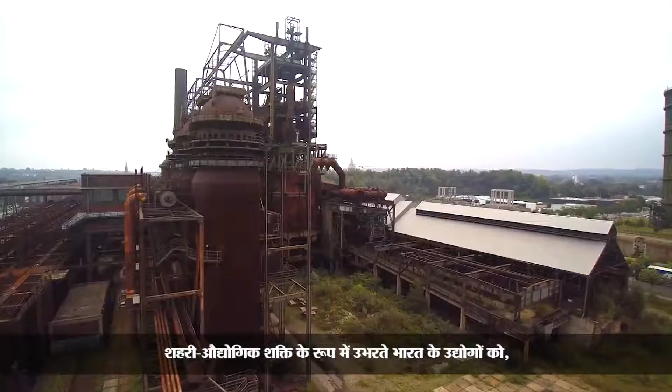As India seeks to propel itself into an urban industrial powerhouse, its industries will need more and more water. This is going to put further immense pressure on the already strained water supply systems of urban areas. 80% of all water that is painstakingly supplied to households leaves as waste. So, do cities require more water, or can they learn to manage their water better?

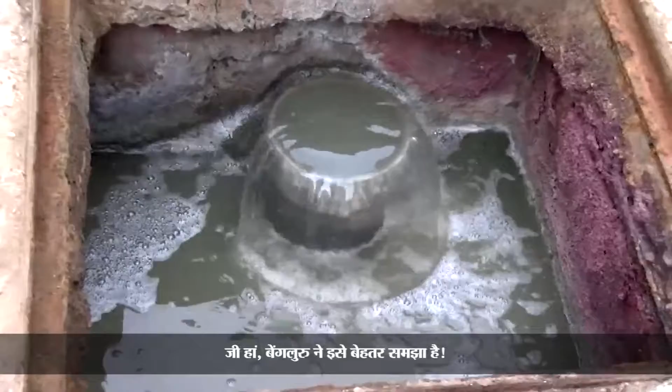Yes, Bengaluru gets it right. It is recycling its wastewater and reusing it for meeting non-potable requirements of the city. Let's see how.

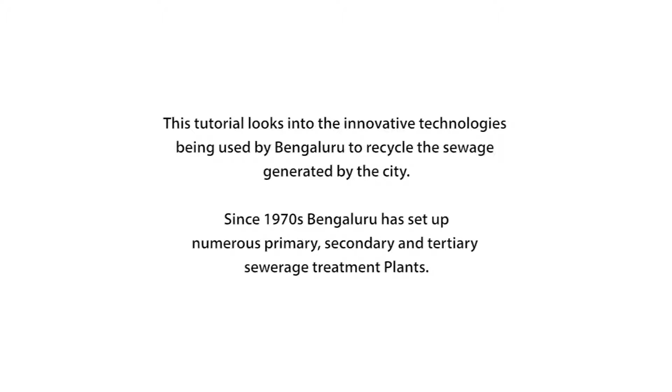स्वच्छ भारत का इरादा इरादा कर लिया हमने देश से अपने ये वादा कर लिया हमने स्वच्छ भारत का इरादा कर लिया हमने देश से अपने ये वादा

Home to 8.5 million people, Bengaluru is one of the fastest growing cities in India. A city of lakes and a city of aspirations, this picture of a beautiful life cracks the moment you inquire about the water supply in an area from those already living there.

Bengaluru, like most cities, was headed towards a severe water crisis. Its location in a semi-arid region makes it naturally water scarce. The Bengaluru Water Supply and Sewerage Board is the statutory organization in charge of supplying water and sewerage services to the city. The city draws 1,350 MLD of water from the river Kaveri, from a distance of almost 100 kilometers.

The board spends 60% of its entire annual budget towards just bringing the water to the city's periphery. Almost 1,000 MLD of wastewater leaves the city as sewage.

Bangalore's demand was never satisfied. The current demand is about 1,600 MLD, and we are supplying about 1,400 MLD of water. There is a gap of about 150-200 MLD. Most of this gap is met out of the groundwater within the city, as well as the wastewater.

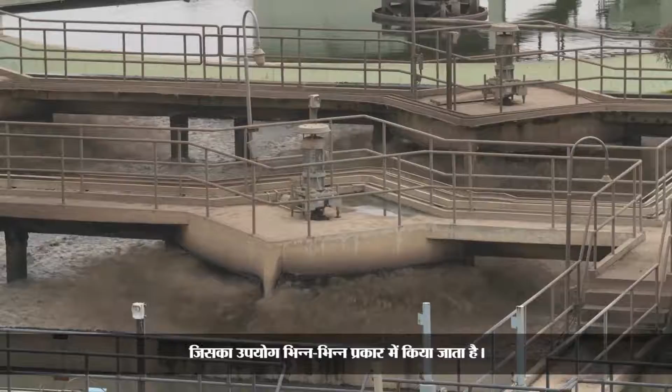Bengaluru has established 4 tertiary treatment plants that produce 73 million liters per day of close to drinkable water. These treatment plants use different technologies and provide water that is then put to different uses. One of them is the biggest tertiary treatment plant in India, set up in Vishwavati Valley, or V Valley.

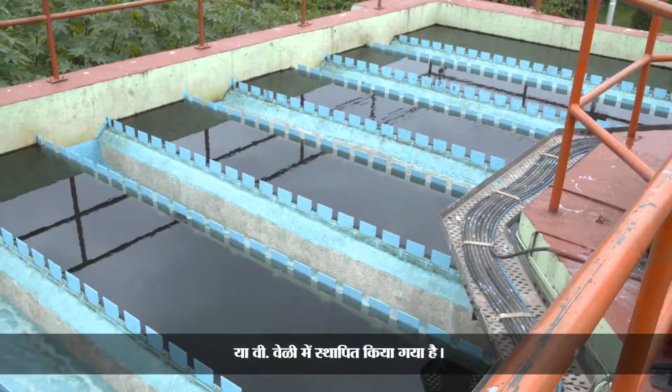The Vishwavati Valley, or V Valley, tertiary treatment plant has a total capacity of 60 MLD and treats 10 MLD of water per day. The V Valley treatment plant was funded by the Housing and Urban Development Corporation of India under the Mega City Scheme and by the Indo-French Protocol. Operation and maintenance of the plant is managed by the French firm Degremont Suez.

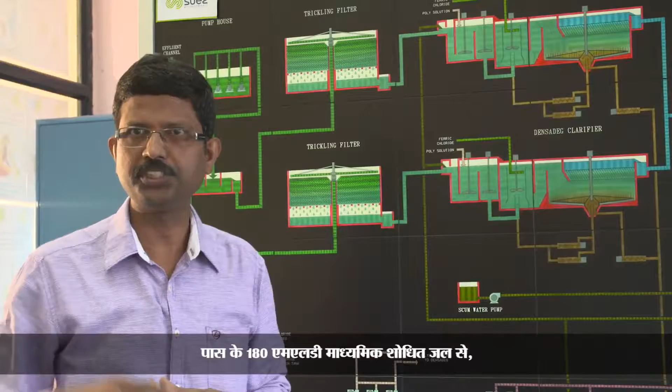One of the biggest recycling plants in India, the capacity of the plant is 60 million liters a day. Essentially what we do here is tertiary treatment of the secondary treated sewage which is generated in the 180 MLD STP, located adjacent to this plant.

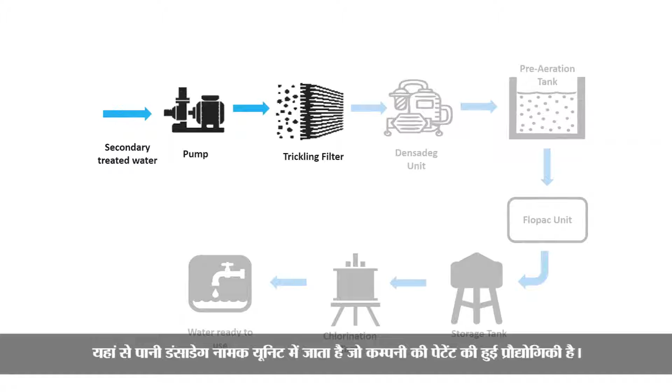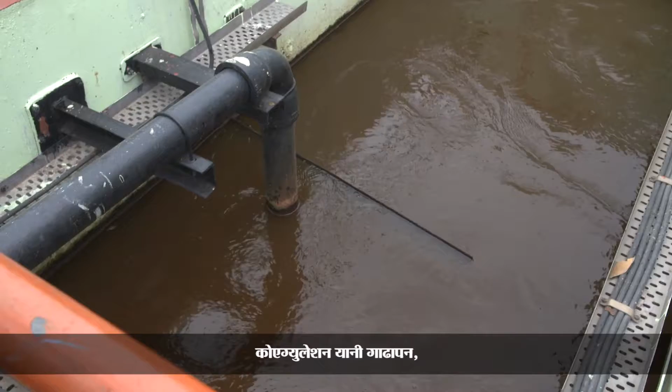The secondary treated water is pumped to the trickling filters. From here, the water then flows into a unit called the Densadeg unit, which is a patented technology of the firm. This unit treats the water through three processes: coagulation, flocculation, and clarification. The water then goes to the pre-aeration tank to raise the dissolved oxygen level in the water.

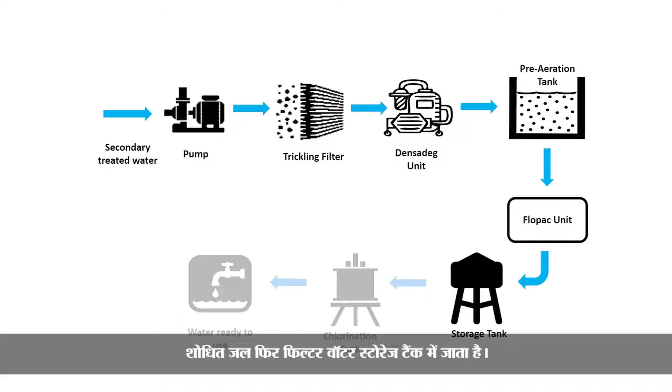The water then reaches the Flopac unit. Here the bacteria in the sand medium eat up the organic matter, and the finer particles settle in the sand. The treated water then goes to the filter water storage tank. The water is then disinfected with chlorine and is now ready to be sold to industries.

The capital cost for the 60 MLD treatment plant at V Valley was Rs 12 crores. The plant is able to cover the O&M costs of the plant of Rs 4.7 lakhs per month through sale of treated water to the industries.

Another major requirement for water in Bengaluru is for irrigating its gardens. The tertiary treatment plant at Cubbon Park provides water for maintaining the park. Their borewells were dry. Then they approached the BWSSB to ask whether it could provide very good quality treated wastewater for their horticulture purpose.

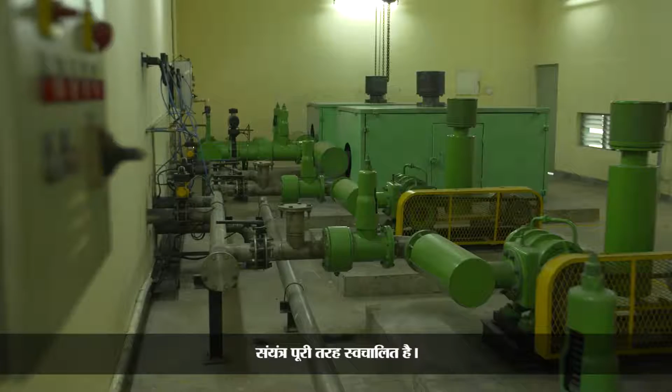Then BWSSB, with funding from the Bangalore Development Authority, came up with a 1.5 MLD state-of-the-art treatment plant. The tertiary treatment plant in Cubbon Park uses membrane bioreactor technology for treating wastewater. The plant is fully automated, and the operation, monitoring and controlling is carried out by a SCADA system.

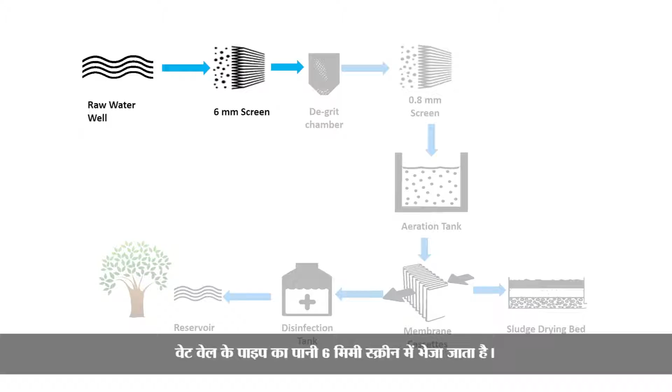The water comes into the plant from nearby areas like Vidhana Soudha, flowing gravitationally into the raw water wet well. The pumps in the raw water wet well pump the water into a 6 mm screen. Here solids like shampoo sachets, plastics, etc. are removed, and the supernatant is sent to the comminutor chamber where degritting is carried out.

Here heavy particles like stones and gravel are removed. The remaining water is then sent to 0.8 mm screens, which are able to remove particles as fine as human hair.

The water then flows to the aeration tank. The bacteria in the aeration tank consume the organic matter in the presence of air and get concentrated. This is then separated by membrane cassettes composed of hollow fiber membranes which prevent passage of bacteria and even

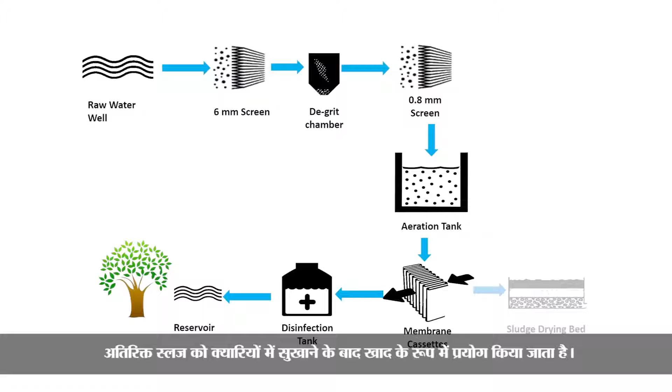viruses. The treated water then goes into the disinfection tank where it is treated with sodium hypochlorite. This water is then sent to the ground level reservoir from where it is sent to Cubbon Park. The excess sludge generated is used as manure after drying in sludge drying beds.

The 1.5 MLD treatment plant at Cubbon Park was built at an expense of Rs 4 crores, while the O&M cost of the plant comes to about Rs 12 lakh per month. Currently, the plant is able to recover about 50% of this O&M cost through sale of treated water to the Horticulture Department for irrigation of Cubbon Park.

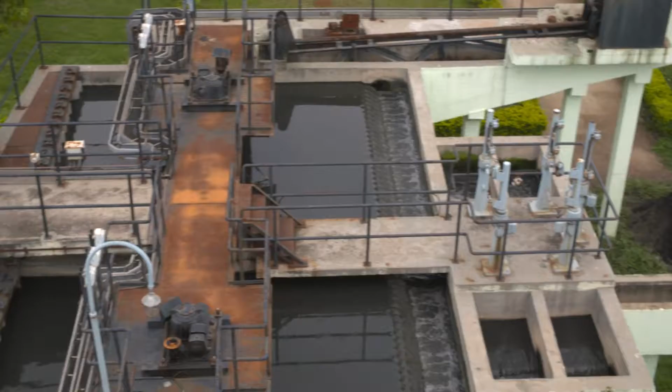It was also critical to improve the quality of water entering lakes, which are important groundwater recharging points. This is being done by the Jakur Sewage Treatment Plant. One of the ways of protecting lakes is to use treated wastewater along with wetlands to fill the lakes. This has, of course, the consequence of recharging groundwater and then becoming available again as drinking water.

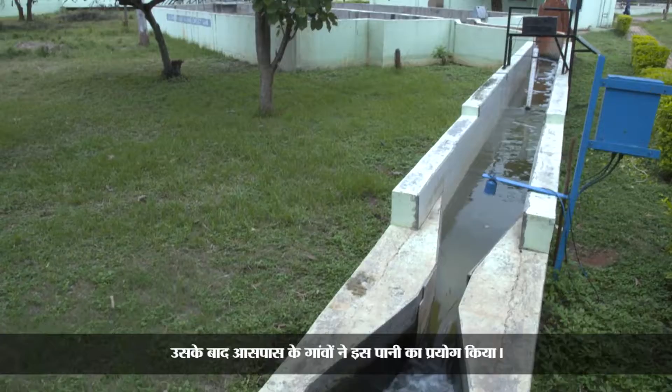The treated water from the Jakur secondary treatment plant nearby was diverted into the Jakur lake. This water was then used for neighboring villages. To improve the quality of the water entering into the lake, a constructed wetland was built between the lake and the plant.

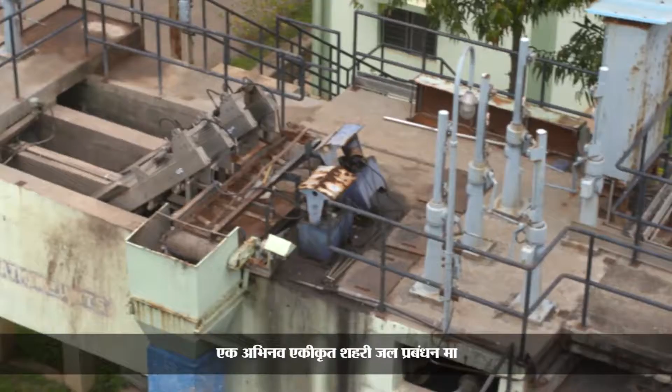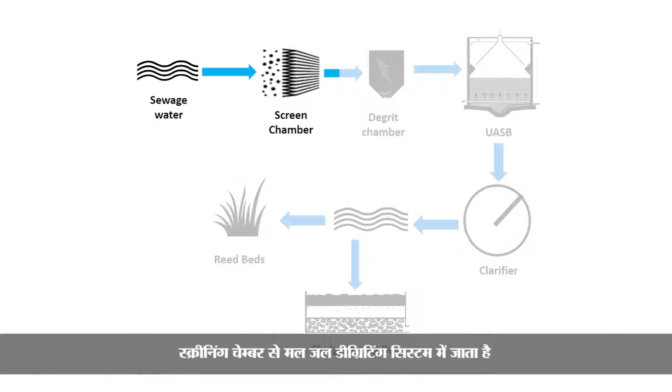With a capacity of 10 MLD, the Jakur secondary treatment plant presents an innovative integrated urban water management model. The plant pumps sewage from the neighboring area of Old Yelahanka town into the screen chamber. From the screening chamber, the sewage water enters into the degritting system, where grit, sand, and gravel is removed.

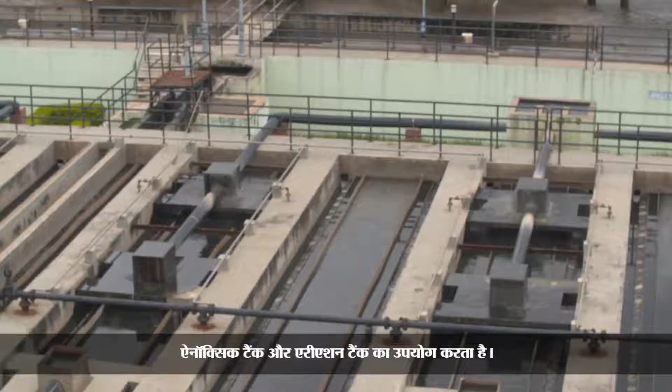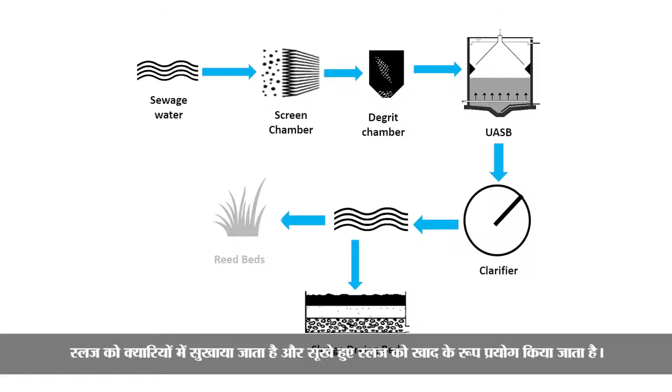The screened and degritted sewage then enters the biological treatment unit, which uses upflow anaerobic sludge blanket, or UASB reactor, anoxic tank, and aeration tank. After the biological unit, the treated water is then sent to secondary clarifiers. The sludge from the process is dried in the sludge drying beds, and dried sludge is used as manure.

After secondary treatment, the treated water is diverted to the wetland. The man-made wetland purifies the water under the action of reed beds. This natural process diminishes the level of nitrates and phosphates in the water and destroys bacteria. The water is then safe to be thrown back into the lake. Over the years, fauna and flora have both considerably developed in Jakur Lake, showing the effectiveness of the treatment.

Yet, recent solid waste outflowing and lack of cleaning have led to a deterioration of the quality of the water. Also, maintenance of the wetland is a skill set which needs to be mastered in order to ensure wetlands remain an effective method for treating wastewater.

The capital cost of the treatment plant is Rs 10.33 crores and requires an O&M cost of Rs 10 lakhs per month. Currently, the plant does not earn any revenue. However, by replenishing the lake, the plant has provided a safe groundwater source to the nearby villages.

Jakur now is feeding so many lakes and also making such an impact on the livelihood of the surrounding villages, Rachenahalli and others. There is sufficient quantity of water and all the open wells are charged. So that itself is a great level of satisfaction for BWSSB.